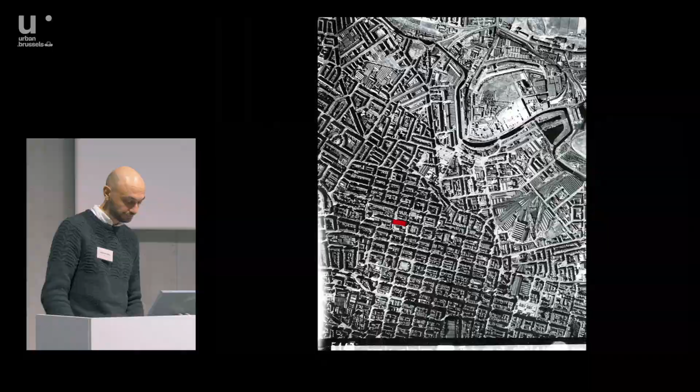At the turn of the century, Glasgow was building 20% of the world's ships. In 1907, whilst John Brown's shipyard, not my shipyard, but another John Brown shipyard, was testing the engines of the Lusitania, the largest cruise liner the world had ever seen, Mackintosh was drafting plans for his masterpiece, the Glasgow School of Art. This was a city with no shortage of ambition.

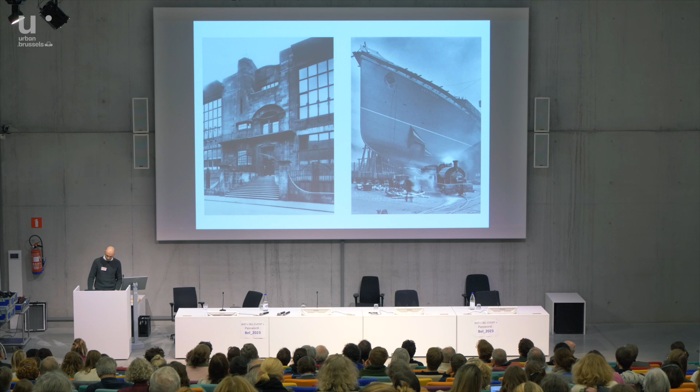The importance of the cultural economy and artisan output of the city had been recognised in 1844 with the establishment of the School of Design. Government-sponsored and funded by leading shipbuilders and manufacturers, it was described as an excellent means of improving art and ornamental design and advancing manufacturing. The school provided an abundance of night classes affordable to the artisan class.

By 1896, the now Glasgow School of Art required a new building, and an anonymous design competition was held. An entry by the offices of Honeyman and Keppie, where Mackintosh worked as a draftsman, was the ultimate winner of the competition. The brief called for a simple building, with the items in red pulled from the brief.

What is required is a building with classrooms that is conveniently arranged and well lighted. The school museum need not be a special room, but might be a feature in connection with the staircase. The accommodation on the north side should be, as far as possible, rigidly kept for classrooms. The south elevation may not have any lights or windows in its walls, in line with the building line, except perhaps on the upper floors.

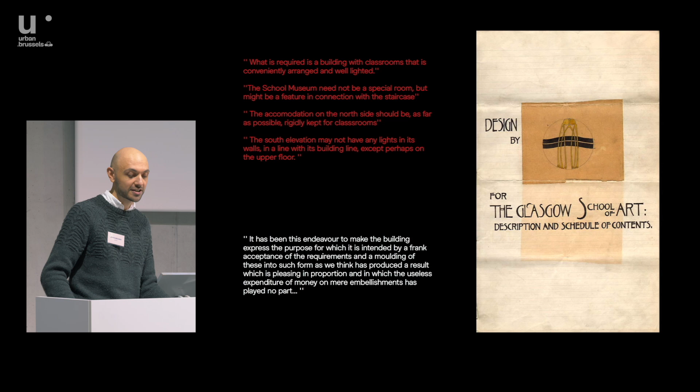Mackintosh, like all architects, gave a written response to this brief, where he maybe stretched the truth slightly. It has been the endeavour to make the building express the purpose for which it is intended by a frank acceptance of the requirements and a moulding of these into such form as we think has produced a result which is pleasing in proportion and in which the useless expenditure of money on mere embellishments has played no part. Anyone who knows the building may question that.

In some ways, though, Mackintosh did design a relatively plain building, and you can clearly read the specifications of the brief in his design. Simple north-facing studios - I must say north is at the bottom of the plan here - a central museum with feature stair, wide corridors for the display of art, limited windows to the south, but with a clever stepped plan to introduce the opportunity for light wells.

The unified appearance of this as-built plan disguises the fact that the building was actually completed in two phases, the eastern half being completed in 1899 and the western half over 10 years later in 1909.

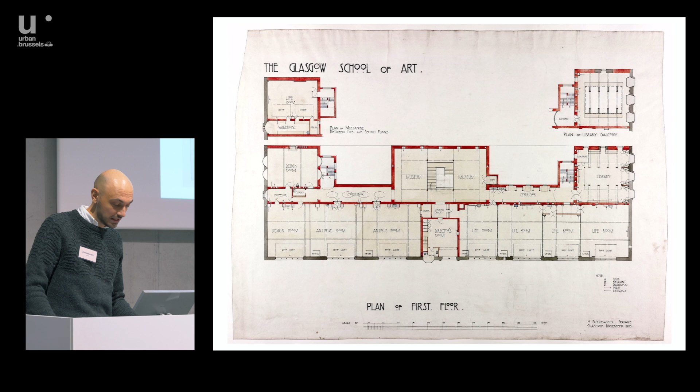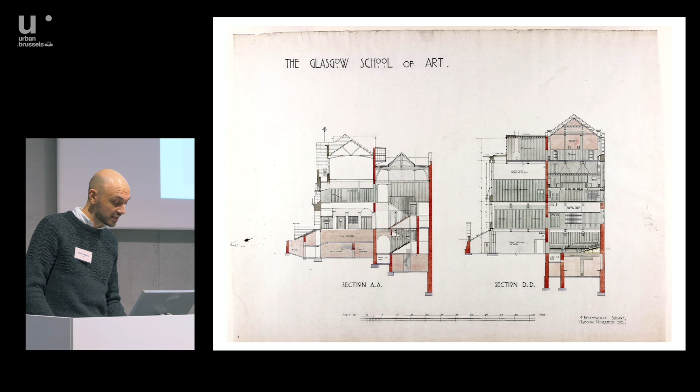The apparent plainness of the building breaks down when the section is revealed. What is a simple 4-storey building to the north becomes over 10 levels when half landings and mezzanines to the south are considered. Due to the topography of the site, the building breaks down into a playful range of volumes that creates a building that transforms vertically in character and complexity.

The imposing north elevation is mostly glazed, creating impeccable lighting conditions for painting. And in the south facade, the rhythm completely breaks down into an eclectic and playful range of openings.

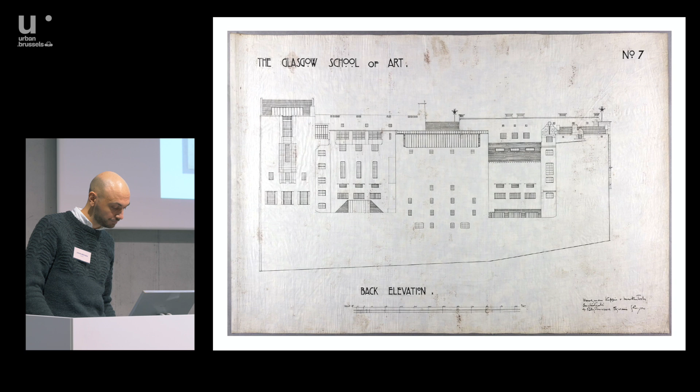It is in the east and west elevations that the stylistic development of Mackintosh as an architect is most evident. The building is simultaneously his first and last major work, and is therefore autobiographical in nature. The eastern elevation, while still an impressive composition, plays with references to Scottish vernacular architecture embellished with Art Nouveau styling. The western elevation, on the other hand, is a strikingly original composition, geometric in nature with little decorative embellishment.

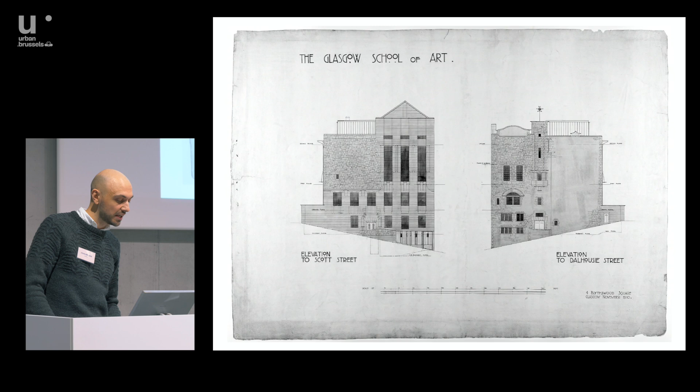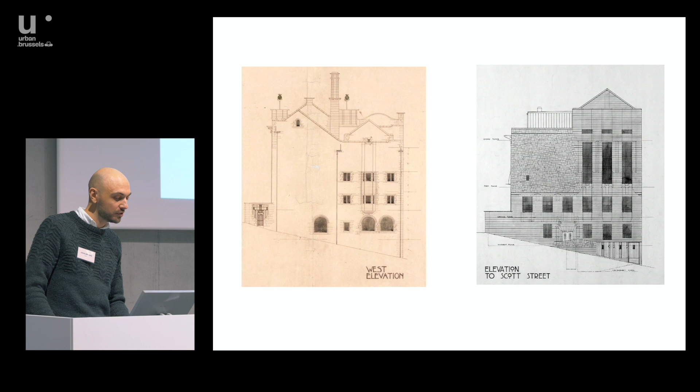This is a comparison between the western elevation as designed in 1897 compared to the as-built proposal, which shows the remarkable development of design confidence in Mackintosh over the period.

The following slides I'm going to flick through without much commentary for the purposes of time, but these are a set of photographs from 1910 of the completed building taken by renowned photographer Bedford Lemere.

If we zoom forward in time again to 2010, 100 years after the completion of the building, it is rightly recognised for its design excellence, but more importantly, it's still functioning as an art school with very little adaptation to Mackintosh's original design. The building has inspired generations of graduates, and the school is now internationally recognised. The building is so synonymous with the identity of the school that to study there is affectionately known as studying at the Mack.

In 2014, a fire broke out in the western basement of the school, caused by a projector set up as part of a student installation of work. The fire swept through the western parts of the building, destroying the famous library and Studio 58. Significant water damage was caused throughout the building.

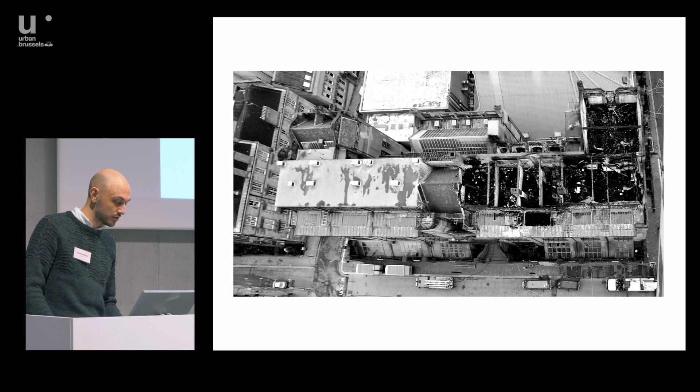A full point cloud scan of the fire-damaged building was carried out, which remains the most valuable primary evidence source for the building. This formed the basis of a 3D Revit survey model, which we used for our reconstruction process.

At that point in 2015, there were still many unknowns about the building, and evidence had to be gathered to inform the reconstruction. The greatest challenge was the reconstruction of the library, which established our reconstruction process that we used across the building.

That process began with rethinking, looking at the knowledge accumulated from research, physical evidence, site surveys, and discussions with specialists and experts on the building, feeding that into reconstruction drawings, which were produced as 3D models.

The production of these drawings was part of that rethinking process, continually going through change.

Remaking: we worked with our in-house model maker to make physical models at 1 to 10 of the library and at 1 to 1 of key junctions to test the accuracy of our rethinking process.

This was then reviewed with an expert panel every several months. We would have a presentation to the expert panel to review our conclusions and our proposals.

Then 1-to-1 prototypes, particularly for the library and other key spaces, were created to test that at a larger scale. And then finally, once we were sure of the accuracy of our findings, the reconstruction took place on site.

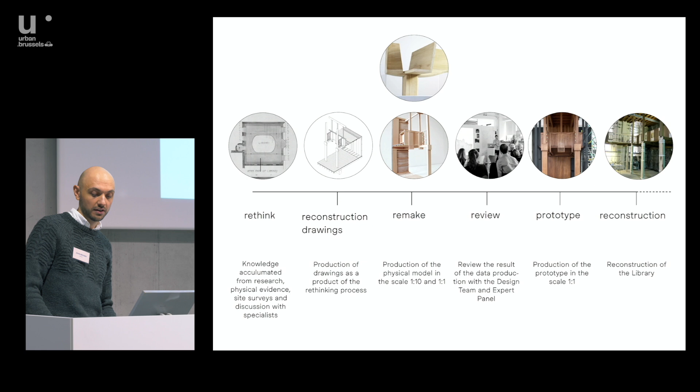This process was recorded in 3D in a Revit model. Each element was modelled individually, and the evidence basis for each element was recorded within the model element as a record.

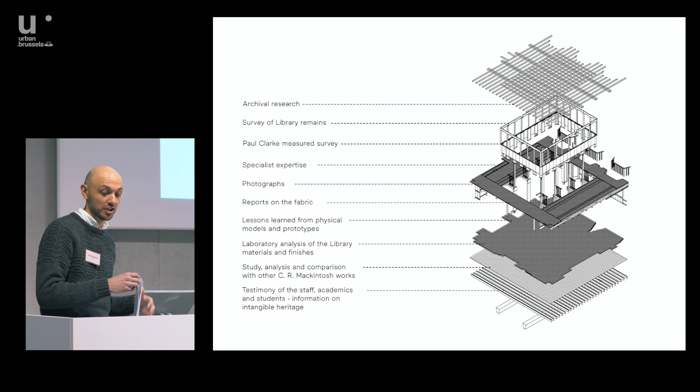While the reconstruction process of the library is often the most interesting topic for discussion, I wanted to share some specific reflections on the process relative to the Turin Declaration.

For areas of the building that were only partially damaged or remained undamaged, the following excerpt from the Declaration became relevant: when there is a conflict between preserving the age value and the artistic value of an Art Nouveau monument, one should give higher priority to the artistic value, but with as much respect for the age value as possible.

When restoring Art Nouveau architecture, one should be more open to removing later additions, reconstructing the original appearance, than for other monuments, in order to secure the original artistic value.

This was an interesting conflict that we had to face. The building had been in use for over 100 years as an art school and did have age value that had to be considered.

However, as we were uncovering layers of the building, so many secrets were revealed, particularly original colour and tone that shed light on the original subtlety of the design that had been lost to many years of cheap paint. That in turn had distorted the understanding of Mackintosh's interiors.

This was particularly true of the corridors, which had been subject to many years of black gloss paint, generally with good intention, I'm sure. Sampling processes for the original finish suggested that the doors had been stained a rich brown colour. Agreeing, however, to remove all finishes in order to return to the original design intent meant removal of the historic paint record. This was, in our view, justified to reinstate the correct interpretation of the monument.

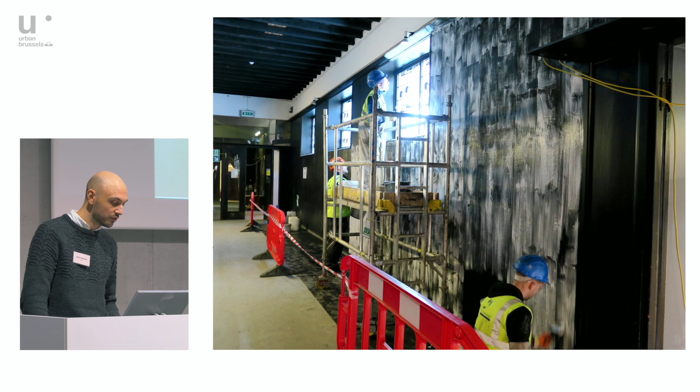Paint removal to the rough boarded corridors was arguably more successful, as removal of the later layers of paint revealed the original finish below, which could be left as found.

Investigations into the historic plaster finish showed that ceilings in the original design had been left self-finished without a paint layer. The project offered the opportunity to reinstate this finish in several areas to great effect.

In other areas, the design that existed pre-fire had been heavily altered, with research uncovering the original design intent. The glazed corridor to the top floor was found to originally have had a timber-gridded roof structure and been stained dark rather than the black and white painted scheme that had existed pre-fire. It was unanimously agreed by the client and the design team that this should be reconstructed to the original design, to, I think, great effect.

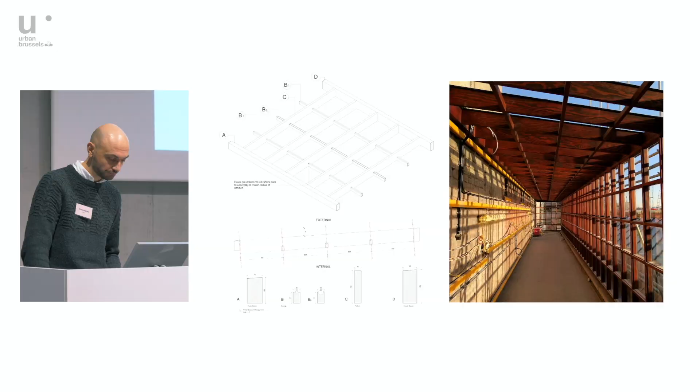On the 15th of June 2018, the unimaginable happened and a second fire broke out in the construction site. The building was closed and secured for the night with no active work taking place. The cause of the fire is unknown, despite forensic investigations. The destruction was too complete for any significant evidence to survive.

The fire comprehensively destroyed all elements of the building besides those made of stone, steel and concrete, leaving it essentially as a ruined shell. The building is now consolidated in a ruined state, however requires extensive scaffolding to support it. Even conserving the building to this level has been a Herculean feat, with significant credit due to Liz Davidson and Sarah McKinnon for their tenacity and dedication to the building, even in the bleakest hours post-fire.

What now is a good question. It's important to clarify at this point that the next section of the presentation is entirely our thoughts as an architectural practice about how the building might be brought back, and it does not represent the views of the Glasgow School of Art. The school have currently put plans for a reconstruction on hold, pending the outcome of legal proceedings, and are developing a revised business case for a reconstruction. The content of this section has been produced by our practice since the fire, considering solutions about how it may be reconstructed.

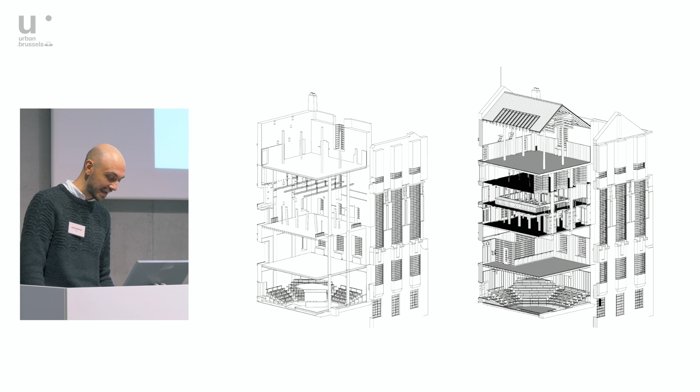The image on the left shows the West Tower as provided to us by a 3D survey company after the first fire, and the image on the right shows the level of detail now included. We have a complete record of the building to inform an accurate reconstruction of the interiors, free of conjecture.

There are elements, however, that have not been surveyed and recorded to this degree of detail. One of the biggest challenges the reconstruction will face will be that of reinstating the decorative stonework. Using the same methodology established for the library reconstruction, each stone must be analysed with photographic, drawn and measured evidence, synthesised into a block-by-block model for the whole building. Large-scale mock-ups must be commissioned to perfect the elegance of detailing and subtlety of lines.

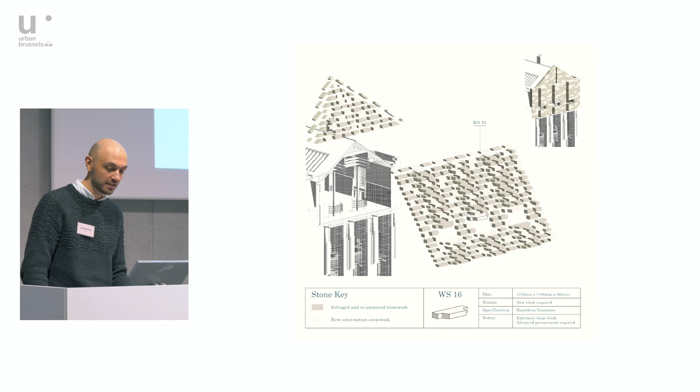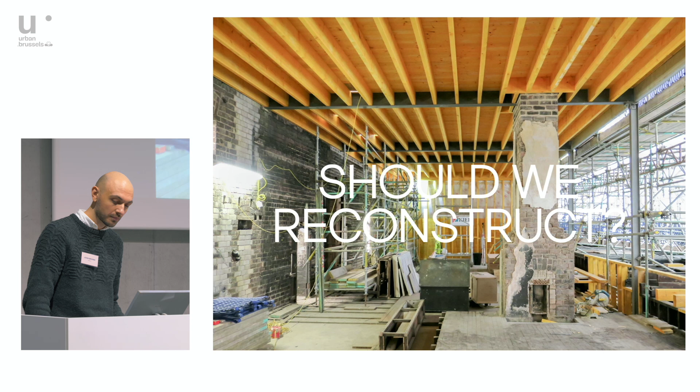A more important question, or a more difficult one to answer, may be, should we reconstruct? In our view, yes, the case for reconstruction is as strong as it was in 2014, if not stronger. The building still has a relevant function and a reason to exist. The design is still largely fit for purpose. We know that an accurate reconstruction is technically achievable, and the philosophical justification remains the same. The design instructions exist if we choose to follow them.

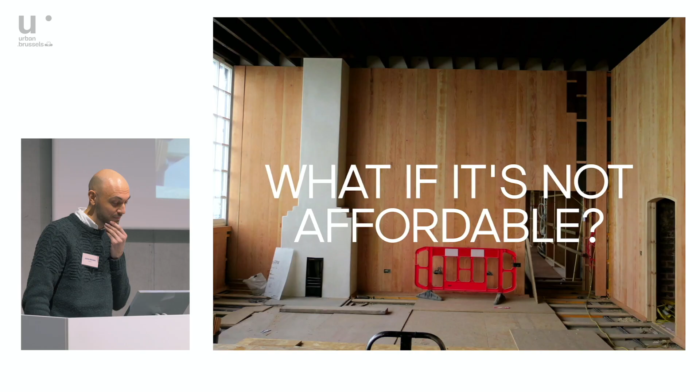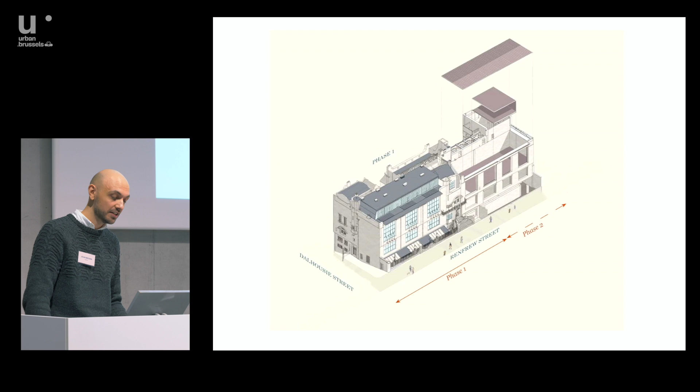A pertinent question in the UK, when this building is discussed, is it affordable, or can we afford it? The school was originally built in 2 phases because they could not afford to build it. The east was then followed by the west 10 years later. This could easily happen again, with a full reconstruction of the east while the west remains under protective canopy and is open to the public in its ruined state. This would allow reconstruction methodologies to be firmly tested and perfected for the final phase while funds are raised.

As part of our study, we also considered the essential elements of the building that make up the design, or the overall experience of the design, to consider whether a partial reinstatement in the first instance was viable. We concluded that the soul of the building exists in the dramatic journey through space and light, from the street up through the arched entrance hall, emerging through a forest of timber balustrades into the light-filled canopy of the museum, along the social corridor with stolen views across the city, through the library, a clearing in the woods to rest with a book, up the simple west staircase to the improbable attic vaults of the loggia, emerging to the glazed lantern of the hen run and the timber temple of Studio 58. The building, to us, is a series of journeys and thresholds.

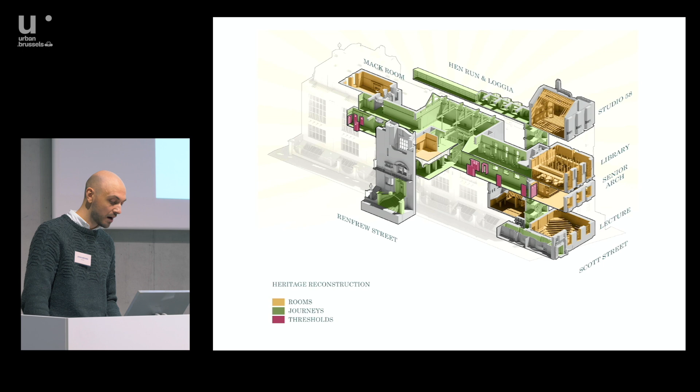We posed the thought that the selective reconstruction of interiors could be viable, as long as due consideration was given to the continuity of the experience. Studio spaces beyond may become more robust and functional. This may be a necessary concession to the practicalities of contemporary art practice.

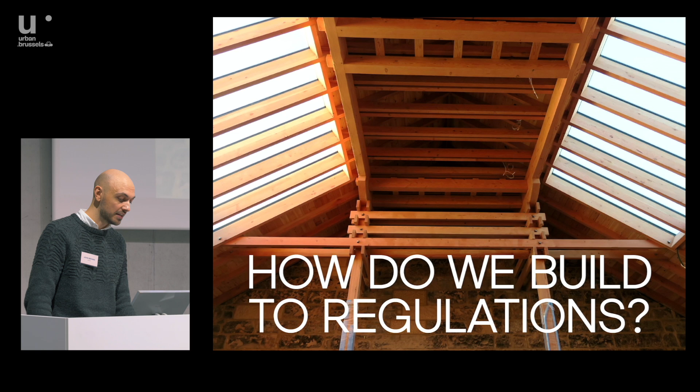How would we rebuild the building to meet regulations? Any new reconstruction would have to face the challenges of accessibility, sustainability, and safety regulations. Access to the building is complex due to the steeply sloping site. Access for students requires improvement, but consideration of tourism and visitors must also be accommodated.

We have suggested that a reconstructed building might contain a series of legible interventions that permit visitor flow and student activities to exist in tandem, creating 2 new lift cores and a new ramp designed to bring all people into the building in a democratic manner. With our knowledge of the building, we were able to select locations that would not interfere with the significant elements of the original design, or the impact could be minimised.

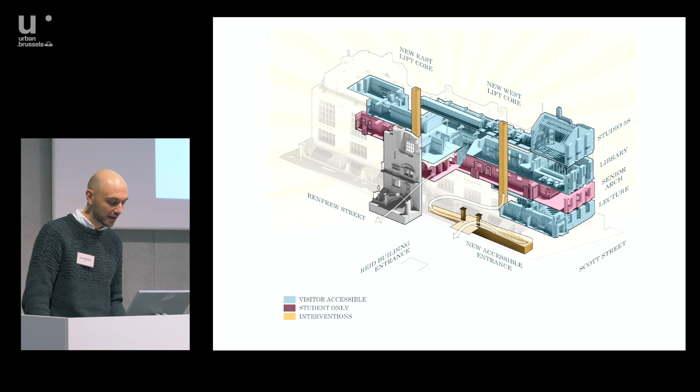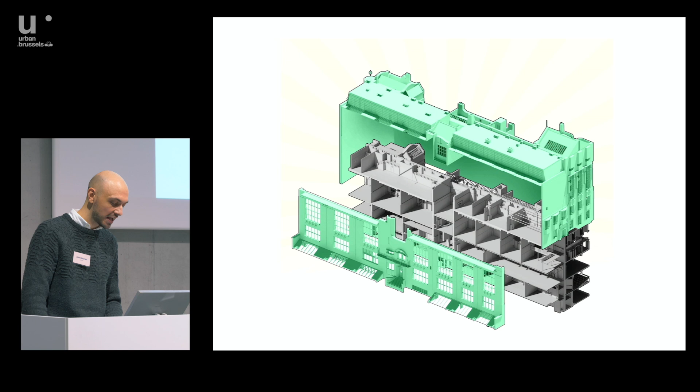The building would have to at least attempt to comply with strict contemporary sustainability targets, as it is likely to be considered as new construction under building control regulations. This would be a key threat to the authenticity of the original design, as items such as delicate single-glazed windows would become problematic. We propose that the building might become an exemplar standard to test what can be achieved in such reconstruction conditions. Achieving the balance between thermal upgrade and authentic reconstruction would require significant analysis, a topic that is not currently included in conservation charters.

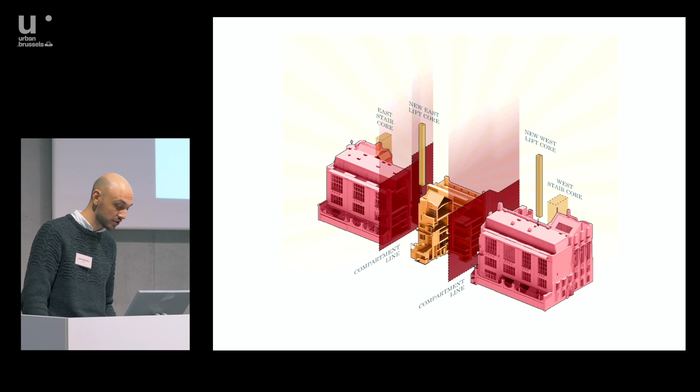The building now has, sadly, a tragic relationship with fire. However, there are fundamental aspects of the original design that would assist for clever retrofit of improved fire performance. Using the historic separation lines of the building's phased construction, along with new insertions such as firefighting lifts, could greatly enhance the safety of the building. A zero-risk policy in construction would have to be adopted, potentially considering phasing the construction to limit installation of combustible finishes until a functioning fire suppression system is active.

To finish, I'd like to consider one of the most remarkable discoveries about the Mackintosh Building. When studying the interiors in detail, it was remarkable how deconstructible, as well as constructible, the building has the potential to be. Unlike more decorative Art Nouveau buildings, the Mackintosh Building is essentially a kit of parts, timber elements simply nailed or screwed together to create remarkable spatial volumes.

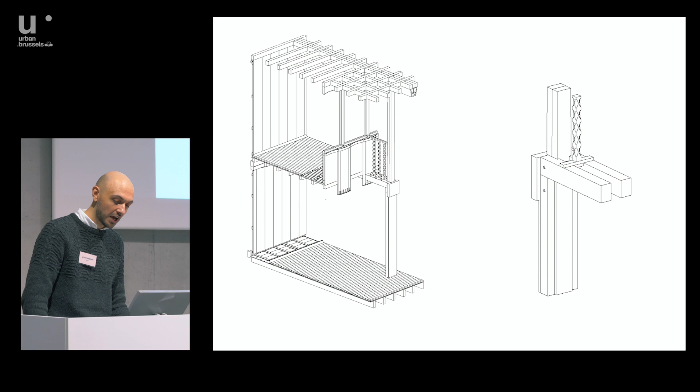During the reconstruction process, a one-to-one prototype of the library was constructed, which remains in storage. This element was used to perfect the design detailing and construction sequencing. This begs the question: why not reconstruct some of the building now as standalone elements? Rooms such as the library could be constructed in a demountable manner for a fraction of the cost of the full building reinstatement, and could be exhibited across Europe before finally returning to the building when complete. What a remarkable homage to Mackintosh that would be, to see his finest work visit the great cities of Europe, to a reception he may only ever have dreamed of.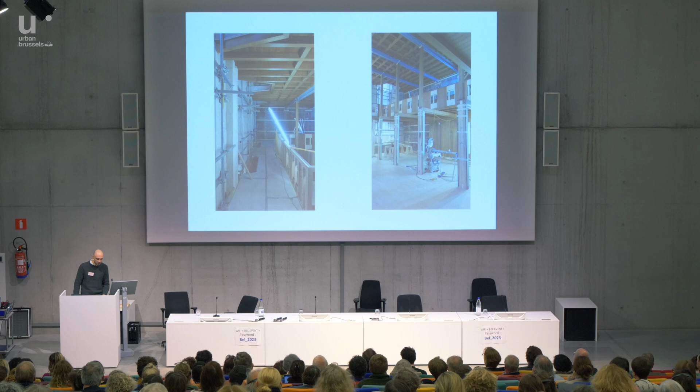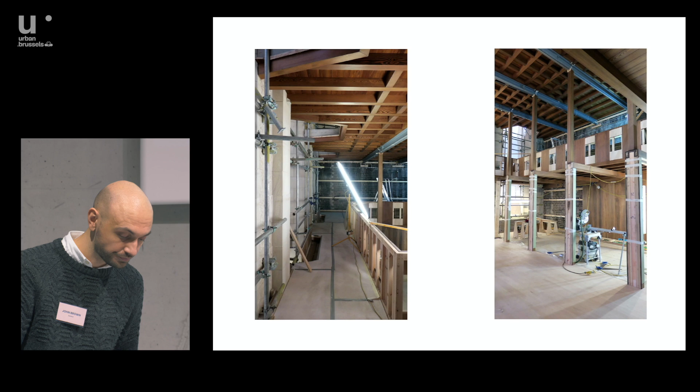What was being achieved on site prior to the 2018 fire was astounding in quality and craftsmanship, enabled by an enlightened client and a team of passionate people who cared about the project and the building. What must happen now is a reconstruction on a much larger scale, with the same meticulous attention to detail and international scrutiny. As a community, we must continue to champion the importance of this building, despite the weariness we may feel after the events of the last decade.

As a school established to train the artisan class, what better training ground for a revival of artisan skill than to faithfully reconstruct the building and let Mackintosh's masterwork inspire generations to come. Thank you.